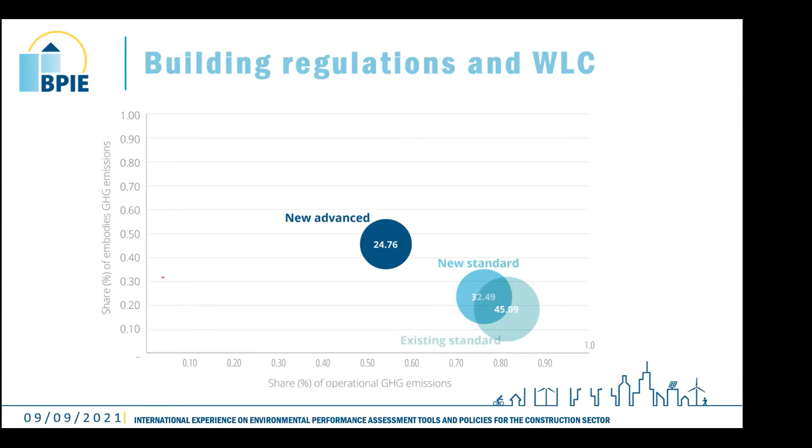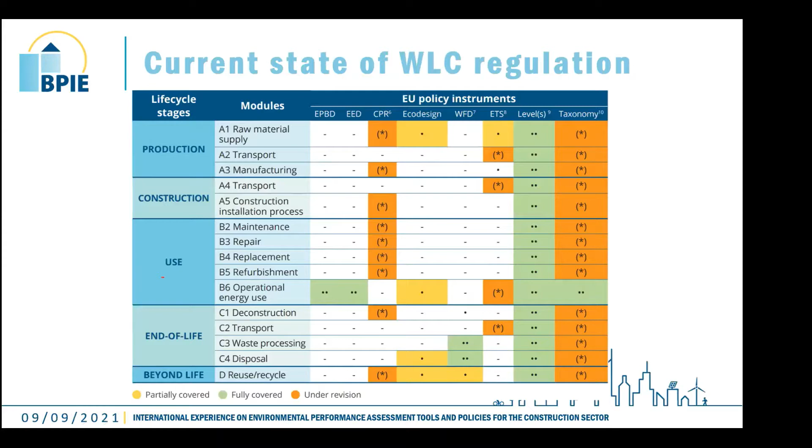Right. So here you can see there's a plethora, a huge range of policy initiatives and measures already in place targeting whole life carbon emissions from buildings. But the issue, as you can also see, is that there is not much consistency. Policy making is happening in silos. But what is very important in addressing whole life carbon in buildings is this level of consistency. Whole life carbon in a way remains unregulated unless the European Commission moves very quickly to review the key pieces of legislation. Can we have the next slide, please?

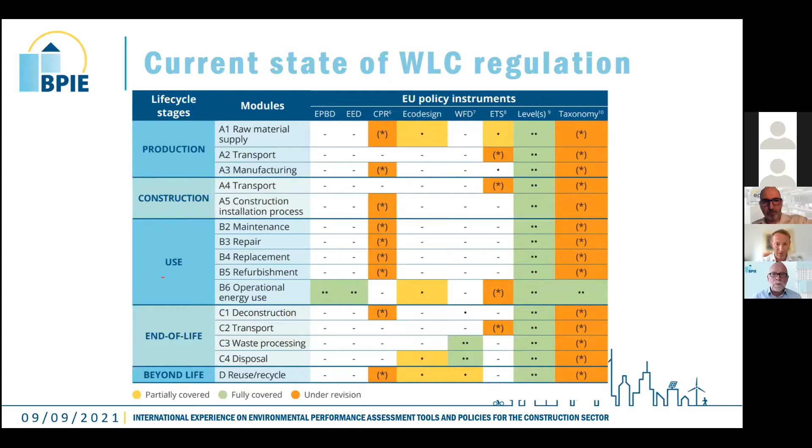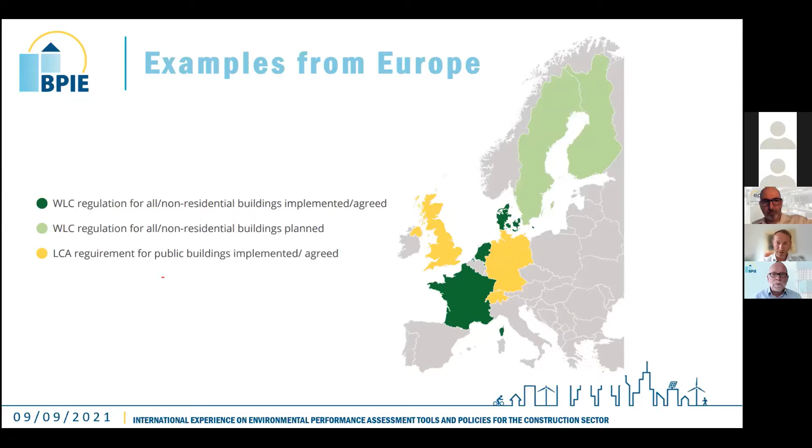Right, so here you can see that beyond the European framework, there are a number of national initiatives in Europe. Some of these address mandatory life cycle assessment for new buildings, like the ones in France, the Netherlands, or Denmark, for example. Others target public buildings through public procurement. So this signals a very clear trend that member states in Europe are moving forward to regulate this, and they also provide a good practice example that regulating whole life carbon is possible and worthwhile to pursue. Can I have the next slide, please?

I just want to give an example of one country, Denmark, because I know later on we will hear about the example of the Netherlands, which can be considered a best practice case and one of the most advanced countries in requiring whole life carbon assessments and benchmarking. I brought up the Danish case because I think it can show how other countries could go ahead with putting whole life carbon regulation in place.

Essentially what you see here is that they have an incremental approach. They started off with a preparation phase, with requirements to collect data and to disclose, assess, and report whole life carbon. Once the data is built up and of sufficient quality, the government is going to set embodied carbon caps and targets at a later stage. As the market catches up with this regulation, the requirements will be tightened gradually.

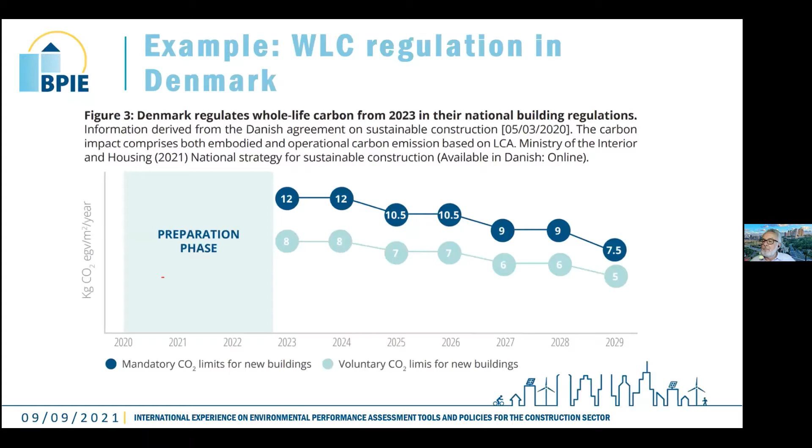Next slide, please. When it comes to a blueprint of how the policy framework should ideally be designed to cater for whole life carbon requirements, we see that we need policies and measures in place at market level, at the material and product level, as well as the building level. Today we are going to talk mostly about product and material level policies, but in a way that they are the building blocks for assessing, quantifying and optimizing whole life carbon performance at the building level as well. So product level policies and emissions cannot be regulated alone.

First of all, we will need to make sure there is market demand for this. This is also very important to avoid carbon leakage and undue burden being placed on certain parts or sectors within the industry. It's also very important that we have the right incentive chain across the whole value chain within the construction sector, which we know is quite fragmented today.

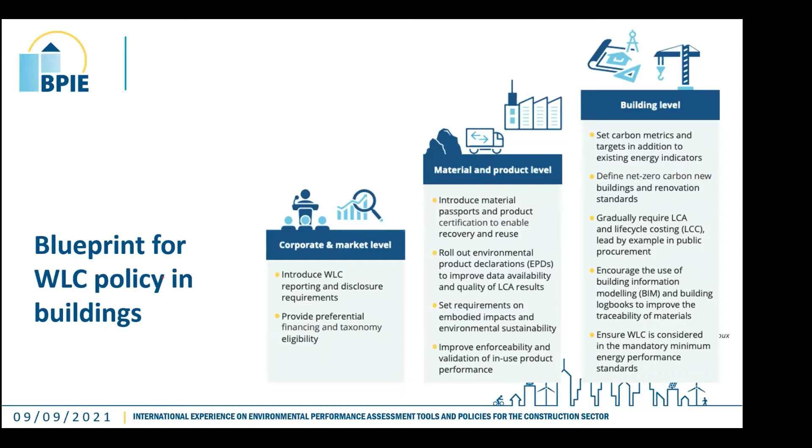Next slide, please. These are my concluding thoughts, some key messages which I'm sure the other speakers will pick up on later. In Europe, many energy efficiency measures are now so ambitious that the low-hanging fruits, the cost-effective measures, have already been taken. So it makes economic sense that the construction value chain is looking for ways to reduce carbon emissions and find solutions from within the embodied carbon sector, simply because these are going to be the low-hanging fruits.

We all know that data availability and accuracy is a critical issue, not just for measuring and optimizing the carbon budget of buildings, but also for policymakers, because they are the ones who will set up the benchmarks and targets, and need to ensure proper enforcement and compliance. However, we cannot use this as an excuse. We need action, first action today. We need to start somewhere rather than waiting for the perfect data to come.

Essentially, what we can see from best practices across Europe is that most of these countries have started off with an incremental approach: reporting requirements, gradually building up benchmarks, setting target values, starting with voluntary measures to build capacity, and then moving to full regulation. I'll stop here because others will probably develop on this in more detail.

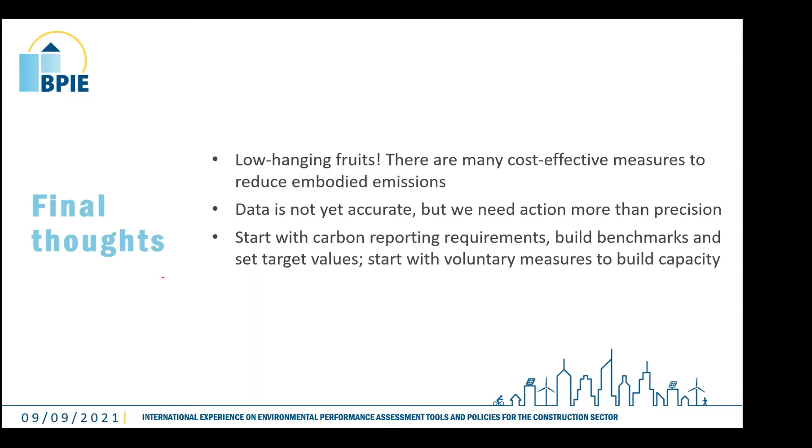Thank you very much, Zsolt, for giving us this snapshot of the European situation and some examples from the European member states on how this whole topic of whole life carbon and life cycle analysis is managed.

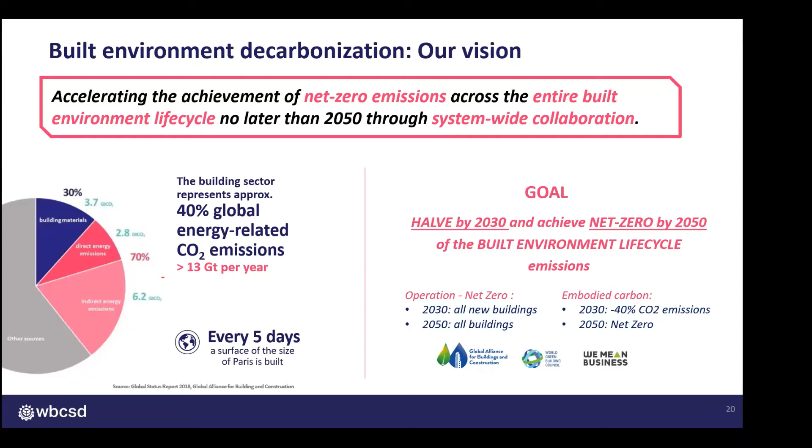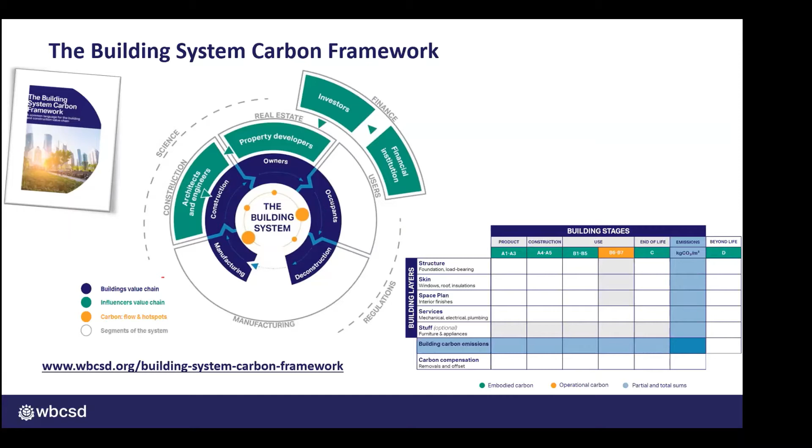Last year, we issued the System Carbon Framework, which looks at how this value chain can work together to reduce emissions. The blue circle is where emissions happen, and the green are influencer organizations—architects and designers, developers, and very importantly investors, who have influence over the whole life carbon of what they finance and develop. And obviously regulation, the topic of today, how regulation can drive this whole life reduction. On the bottom right, you see the framework, and I'll go briefly into this in the next couple of slides. Next.

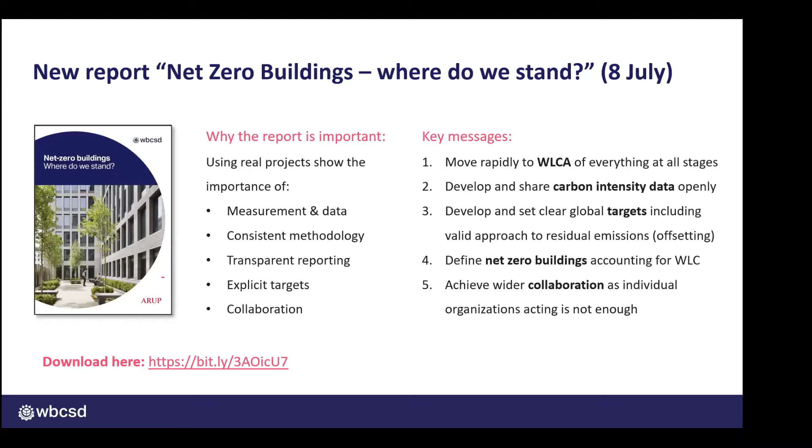We issued in July a new report based on the Building System Carbon Framework, developed with the help of Arup, covering 6 case studies. Just 6 buildings might sound like nothing, but the work was very hard to do, even on Arup-owned projects, to get all the data. We believe this report is important because it shows how we need to measure and report data consistently, and start looking at the targets we need to set across all projects, and how we collaborate to achieve them, strengthening the argument made by Joel about moving to a full life cycle approach towards net zero.

Just a few more technical details on this report. We've taken the Building System Carbon Framework, which puts two charts over each other: the whole life cycle stages from EN 15978 in the middle, showing the life cycle of a building, and on the right-hand side how a building is made up, from structure to facade. This shows how we account for all the emissions across these dimensions. That's what the system framework does.

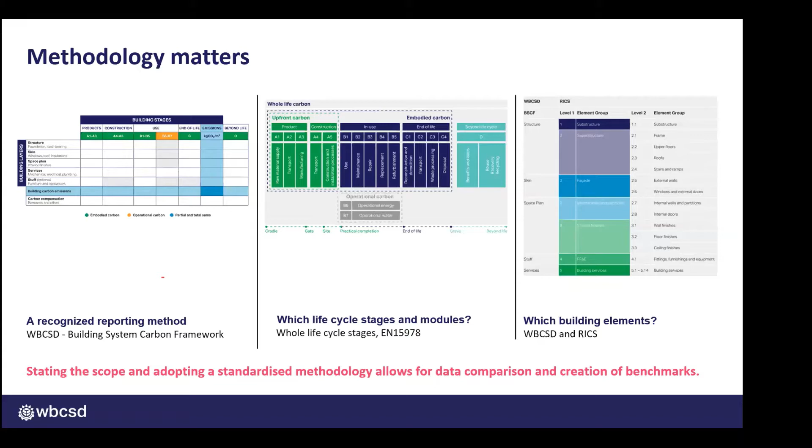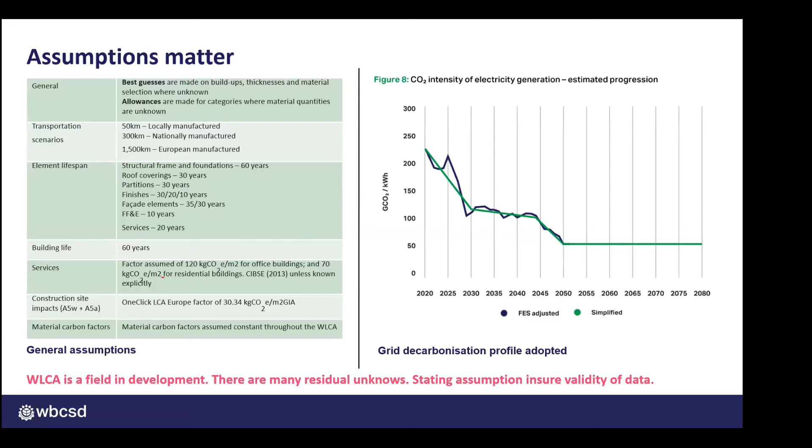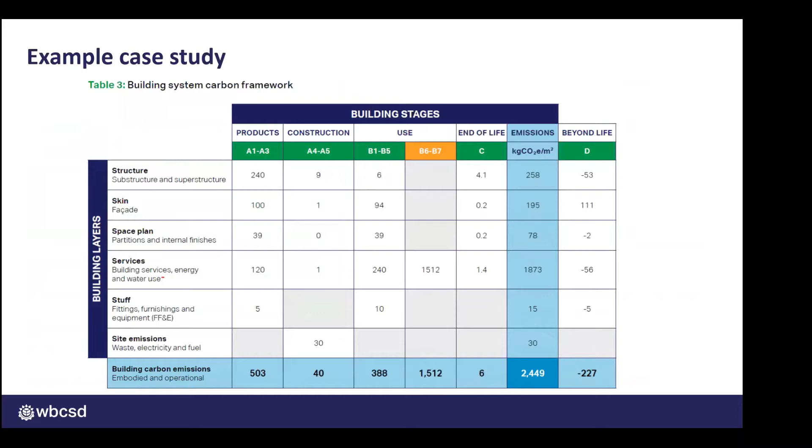This is one example output of such a case study. You can see the building stages and the layers, transparently accounting for all the emissions. On the right, there's a column beyond life—that's Module D. This isn't agreed upon today in terms of how to assess it or use it in LCA, but it's there to show and could support future circular economy strategies to reduce emissions, shown in the bottom right corner, toward net zero.

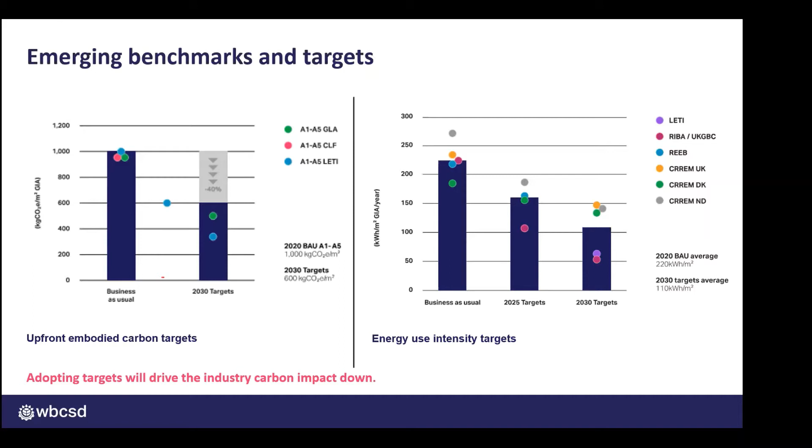In summary, we need to measure more, share data openly, and this report comes with a call to action to our members and other building stakeholders: please send us case studies on whole life carbon approaches. We also need to start setting clear targets. On net zero, there's an ongoing discussion about what constitutes a valid net zero claim, and guidance will be coming out later this year on how to drive toward net zero. But there's already a lot we can do today with existing technology and practices. We'll present this at Climate Week if you're interested in joining the formal launch of the work.

Lastly, I want to mention one other piece of work directed more at investors. Looking again at the value chain, investors and developers play a very important role as demand-side players—though this could equally apply to a city or national government through its procurement strategies. The question is how you can set requirements at the very earliest stage of projects to integrate embodied carbon. It's a practical report showing about 50 different requirements that can be set—no-regrets requirements that can really drive this conversation forward.

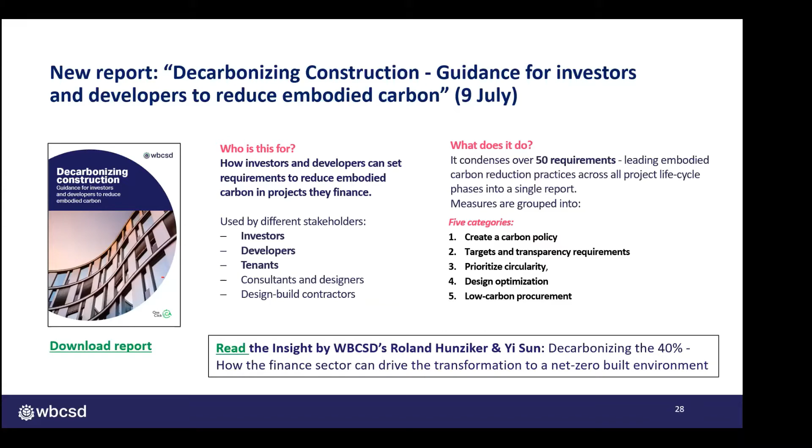Thank you, Roland, thank you very much for giving us these case studies and already highlighting the difficulty of getting reliable data. I'm quite impressed by the analysis you have done here. We'll dive into some of the details later. I'm sure there will be questions, and we're already getting some questions here in the chat, which is great.

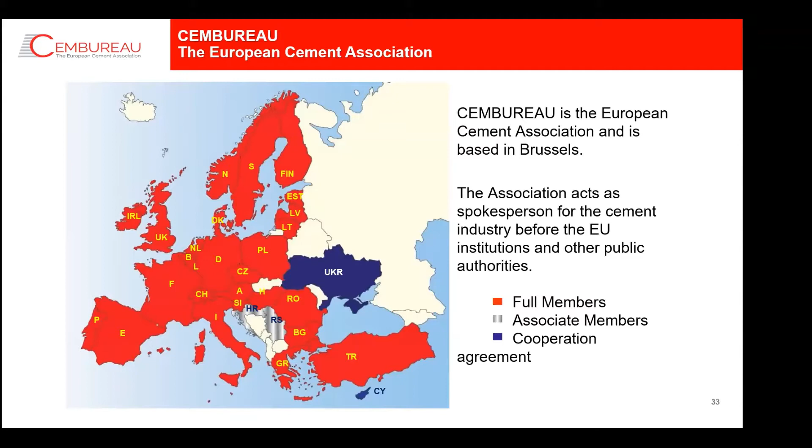So I joined CEMBUREAU 13 years ago. CEMBUREAU, as you can see in this graph, has a large representativeness of the cement industry in Europe, and also counts on cooperation and membership from countries outside Europe, like Turkey and Ukraine. So please, the next one.

I find the sequence of this event quite appropriate. It's interesting to be a representative of the European cement and, in a way, concrete industry. I'd like to start by saying that the cement and concrete industry takes very seriously this responsibility to reduce upfront CO2 in construction. Bearing in mind this responsibility, CEMBUREAU published last year its roadmap to 2050 climate neutrality, taking this approach along the value chain of cement and concrete. Cement is a very difficult sector to abate CO2 alone, but neutrality can be reached if we have the whole value chain together, each part taking its measures to reduce CO2.

This links to CEMBUREAU's position, which aligns with most of the other construction manufacturers in Europe, that environmental assessments should be done at the building level rather than at product level. As the pictures show, construction products are intermediary products to a final product, just like the pieces of a washing machine. In the end, it's the washing machine which is evaluated for its energy efficiency, and likewise the final product, the building or construction work, should be evaluated for its environmental performance.

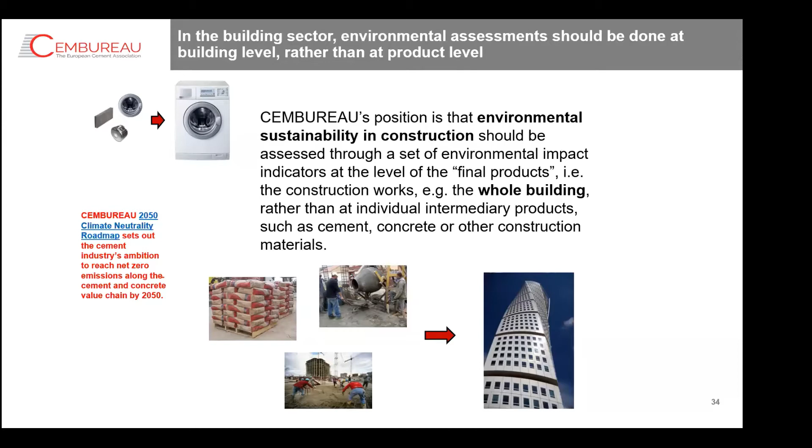Next, please. Environmental product declarations have a key role in all this. CEMBUREAU has been one of the first supporters of producing EPDs for cement. The first EPD for an average cement in Europe was back in 2008. Last year, we published updated EPDs for the three major cement types in the European market, which can be downloaded from our website. So we have always trusted EPDs to be the source of environmental information that the market needs for decisions about the whole construction project. Next, please.

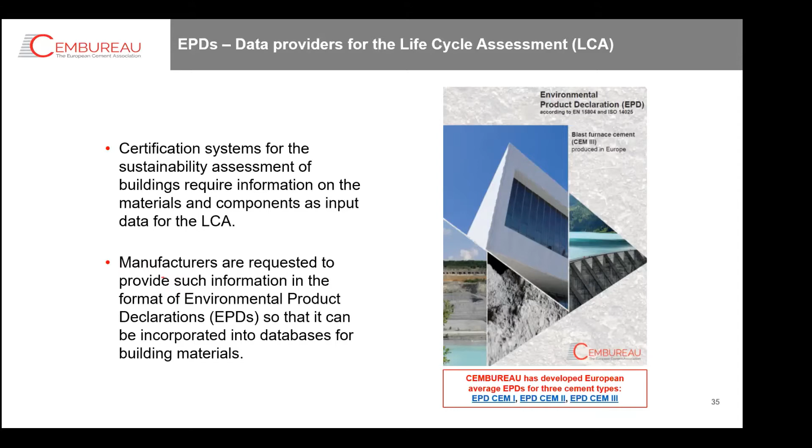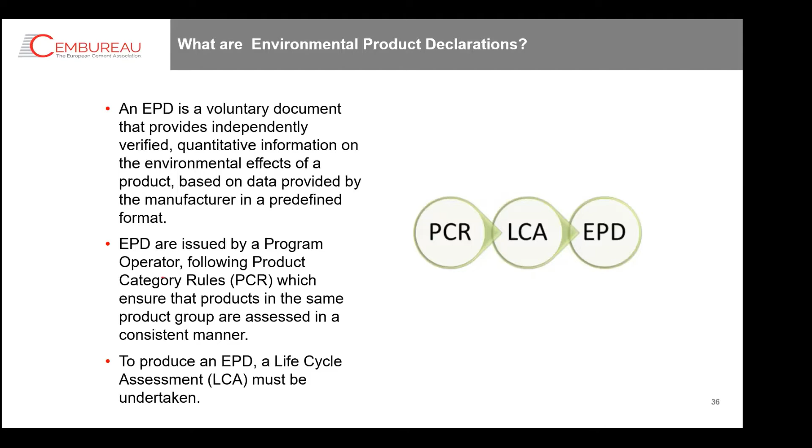So this is based on the life cycle assessment. As you might well know, the life cycle assessment is an evaluation of the environmental impacts of a product from the extraction of raw materials through the end of its useful life, which is called the cradle, and the last stage, the grave.

Usually, environmental product declarations for construction products actually take the stages from the extraction to the gate of the factory. So it's usually called the scope cradle to gate. And if it includes transport, it goes from cradle to site. Next, please.

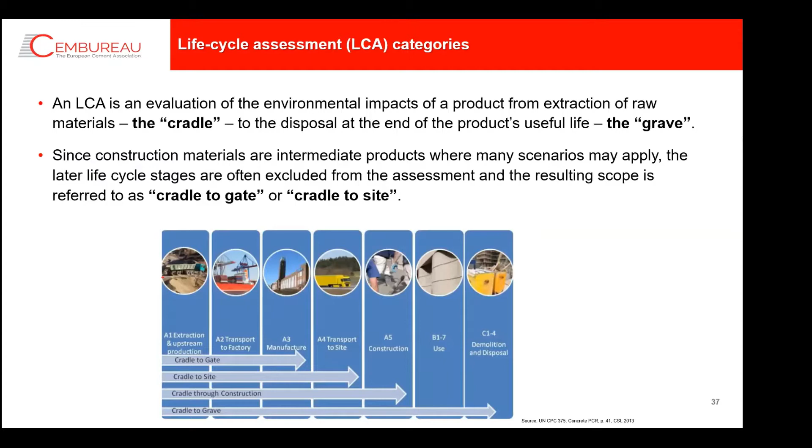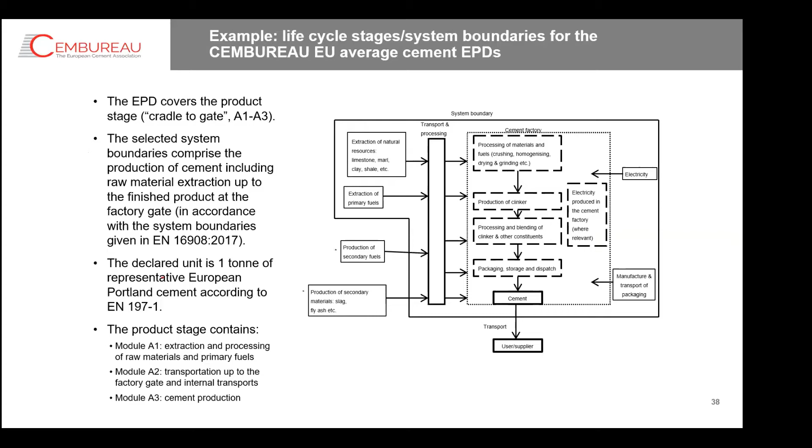Well, the previous one, there was one before, was just to show the scheme that is used in the cement EPDs that you can check in our EPDs that are available. Next, please.

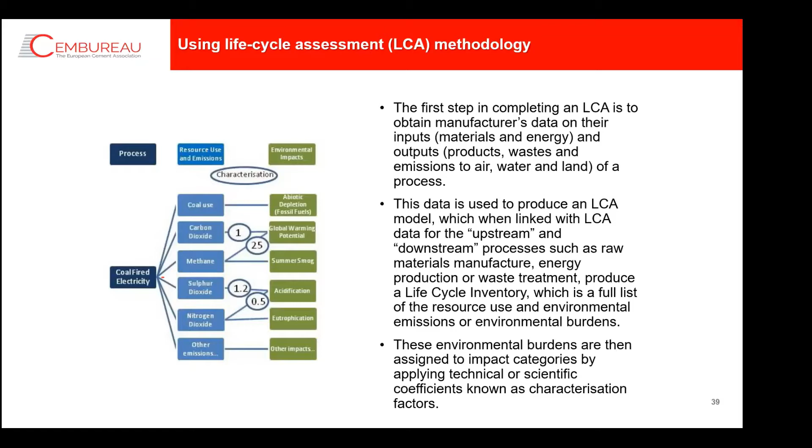This will produce a life cycle inventory that in the end will become environmental burdens on which some characterization factors are applied, which will give some quantitative figures that will form the EPDs. Next. These figures are not so easy, or maybe not easy at all, for a layman who does not know exactly what they mean.

So actually the EPDs are meant to provide information for professionals related to life cycle analysis of a product. So EPDs are not actually meant to be used for comparisons at product level, but actually to provide information for an LCA. Next, please.

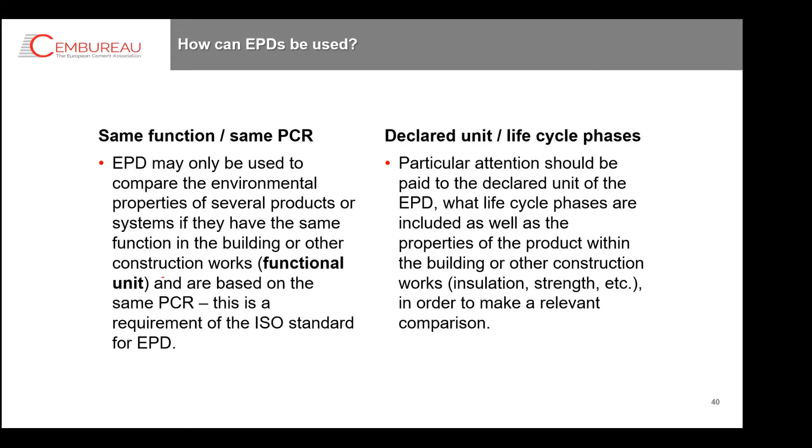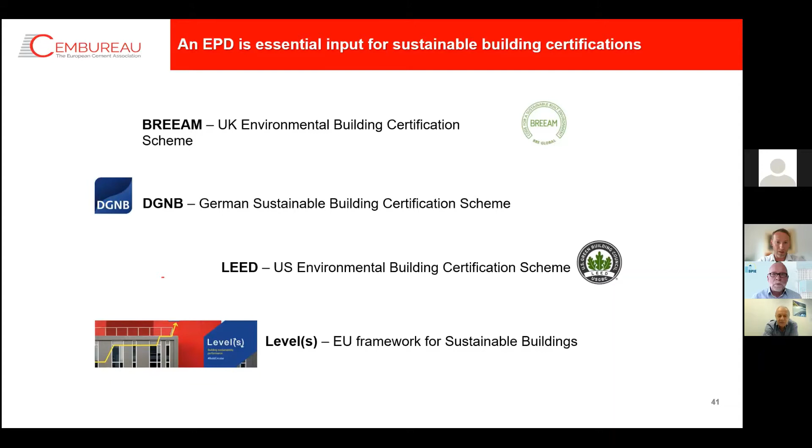There's also Level(s), which is not a certification scheme, but actually aims at being incorporated in these schemes, which is a framework that was recently launched by the European Commission for sustainable buildings. And I'll speak a little more about that. Next, please. So this, I wanted to show the relevance of having an EPD for these certification schemes.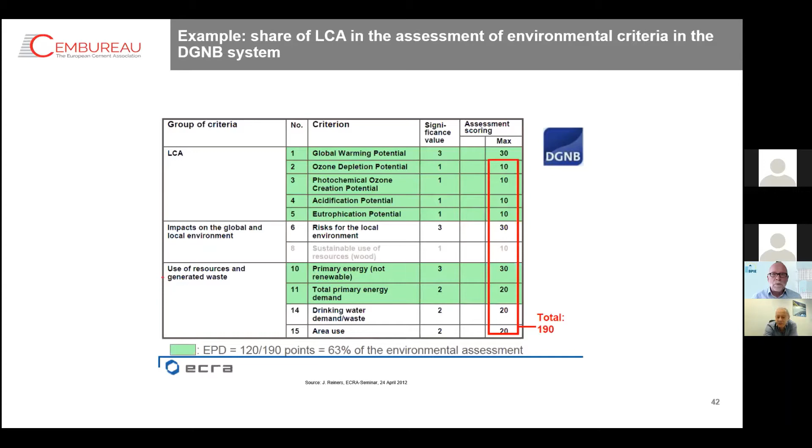For instance, DGNB, from 190 points of environmental criteria that are required, 120 can actually be taken from EPDs, which means that 63% of the environmental assessment could be taken from EPDs. Next, please. This also shows the relevance of having the assessment at the final product, at the building level.

Because you see here, for instance, how an EPD, for instance for cement, is used as input for the environmental assessment for this certification scheme. In this case it's DGNB. So you see that the cement has a very strong environmental footprint, but you can see in the flow that this impact is diluted along the way.

And the whole assessment of sustainability does not take only the environmental performance, but also the assessment of economic and social performance into consideration. So the EPD shows once more its importance as input to these certification schemes. Next, please.

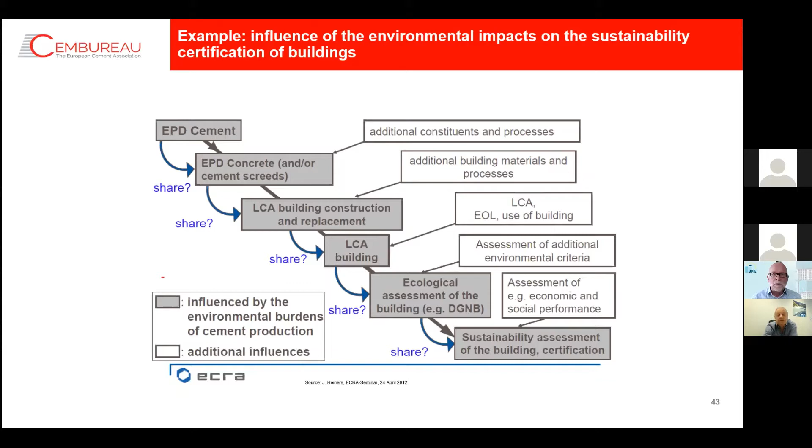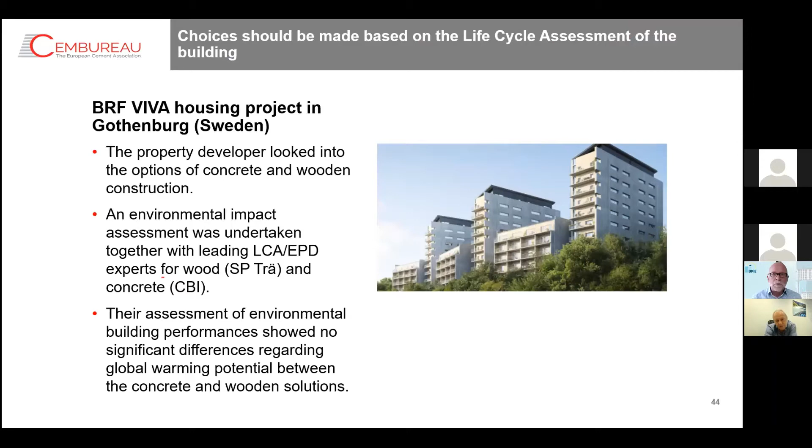And the result was actually that the LCA showed that in the end, both of them do not have such big differences in terms of their potential. So once again, the importance of having the assessment at the project level, the building level, and not at the product level. Next, please. Next.

Yeah, and then a little more about Level(s). Level(s) is this framework for sustainable buildings that the European Commission put forward a few years ago. Cembureau had 3 pilot projects by cement and concrete companies, HeidelbergCement, CRH, and Holcim. And these projects were really successful ones to test this framework.

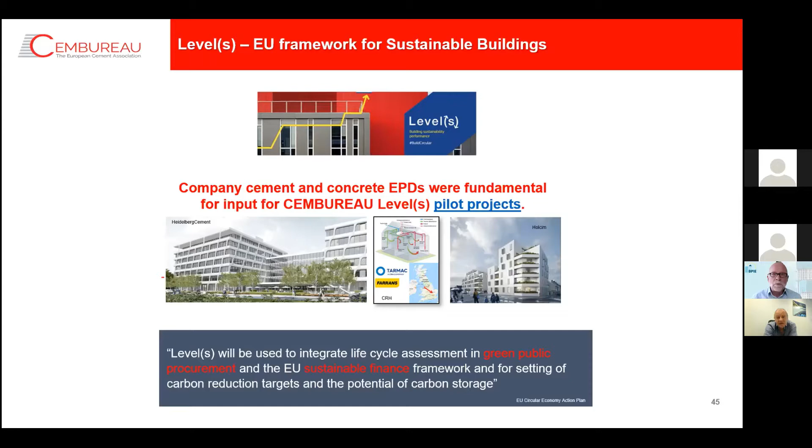And EPDs for cement and for concrete were fundamental for us to have our assessment of this framework. And it's important to say that Level(s) is being used now in the EU for green public procurement, and also for the sustainable finance framework. So the relevance of EPDs behind the system is quite easy to see. So finally, just as takeaways from this presentation, next, please.

I'd like to come back to the fact that the EPDs are extremely useful to serve the market needs with detailed and verified environmental information, and they are meant for business professionals that are dealing with LCAs. The EPDs provide transparency information, and they are not to be used for comparisons at product level, or not even on individual indicators that are there. And the true assessments can be achieved only in the context of the full construction lifecycle. These are my takeaways, and glad to take part in the debate later on.

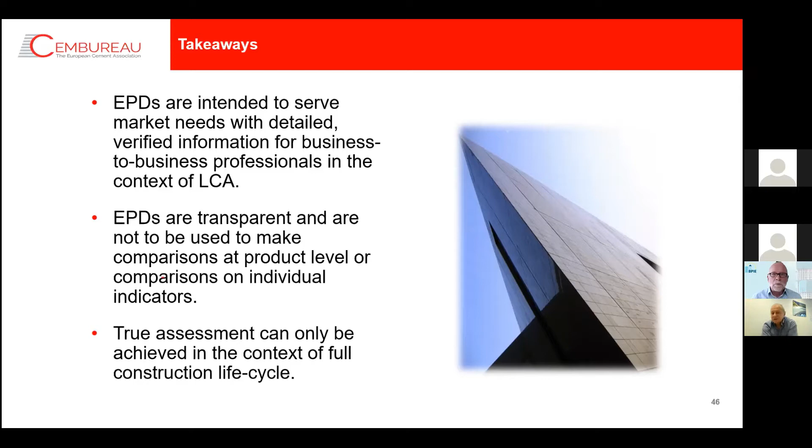Thank you very much for this overview. Later in the discussion, I would actually like to cover a little bit the question, what is driving environmental product declarations in Europe? I think we should talk about that and explain to the audience how this tool was actually established. But we'll come to that later in the panel session. For now, I would like to thank you. And as I said earlier, we will go into more detail throughout the presentations of the experts.

I'm very happy to welcome now two presenters in one go, John Driessen and Tom de Boer, who are both from the Dutch National Environmental Database. They will introduce that environmental database. They will talk about the structure, the governance, the business model, so everything that is needed to set up and make this database operational. And then Tom de Boer in particular will also talk about its application, how it's being used. So I'm very happy that the two of you can join us today.

I hope you are there. If you could please switch on your camera and your microphone, then we will start with the presentation. John Driessen, you are the first to start, if I'm not mistaken, and then we have Tom de Boer. John, are you there? I can currently not hear you, unfortunately. Hello. Yes, now I can hear you and I can see you. Wonderful. And you can hear me, Oliver? Yes, now I can hear you. Thank you very much. And we have your presentation on the screen. Okay. So please go ahead. Thank you again for joining. Yeah, sorry, my excuses for the complication with the sound.

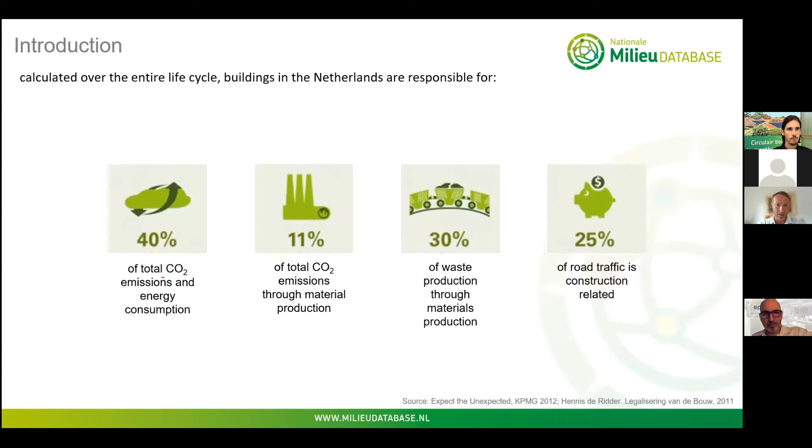Calculated over the entire life cycle, buildings in the Netherlands are responsible for 40% of the total CO2 emissions and energy consumption, 11% of the total CO2 emissions through material production, also 30% of the waste production through materials production, and 25% of the road traffic is construction related. This brings us to a long road to buildings decarbonization in the Netherlands.

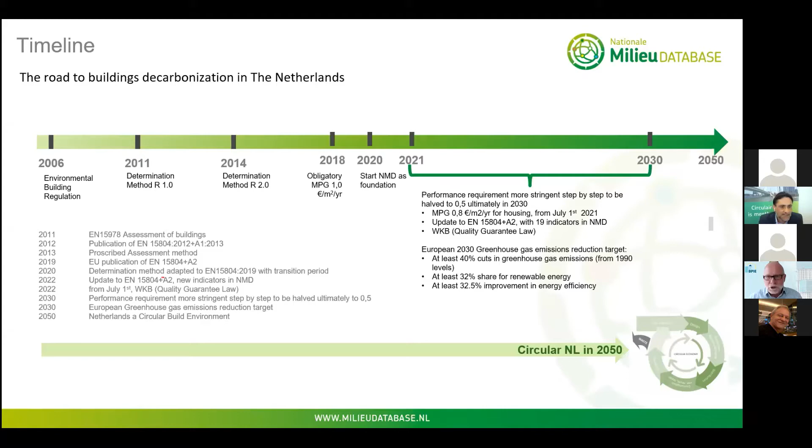The Nmd is established as an independent organization to manage and maintain the determination method and the associated database. We are responsible to keep a uniform assessment method based on the LCA and the EU norms. We have the storage of reliable LCA environmental data on a central database hosted as an independent organization.

We work in construction with market parties and government. We do the comparison of buildings, and we don't do the comparison of products. We're an organization of a transparent and verifiable system. And we aim to have a level playing field for all involved parties. Next.

Like I said before, our common goal is to make in 2050 a circular building environment in the Netherlands. Next. The structure of the Nmd Foundation is as follows. We're a small company with a big responsibility. Like I said before, we were before the SBK, a construction quality foundation. It was a kind of authority and keeper of the database and determination method. We had to split to be independent and objective in the Dutch market of construction materials.

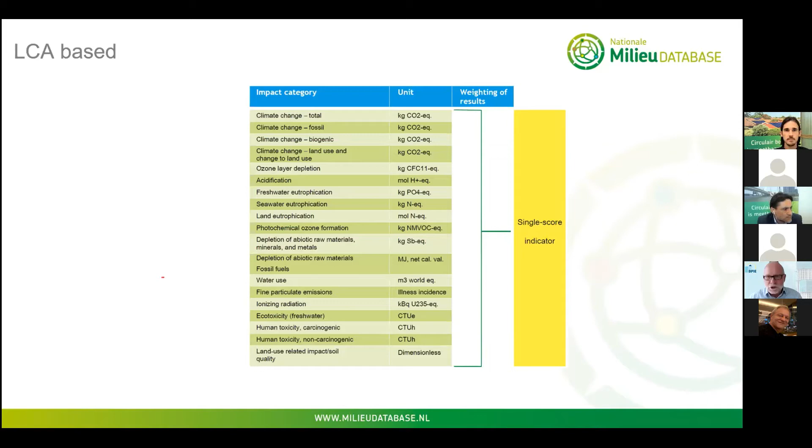A second application is green procurement. So especially in the infrastructure sector, this is used to make it possible at least to compare different kind of organizations that subscribe to certain tenders, to compare them based on environmental scores.

Subsidies are granted based on the sustainability of certain products or circular buildings. So that's the third application. It's also used in BREEAM, like the previous speaker already mentioned. And we also have a Dutch organization that makes use of this, the BREEAM-NL. And lastly, it will be used for quality regulations in the future, probably from 2022 on.

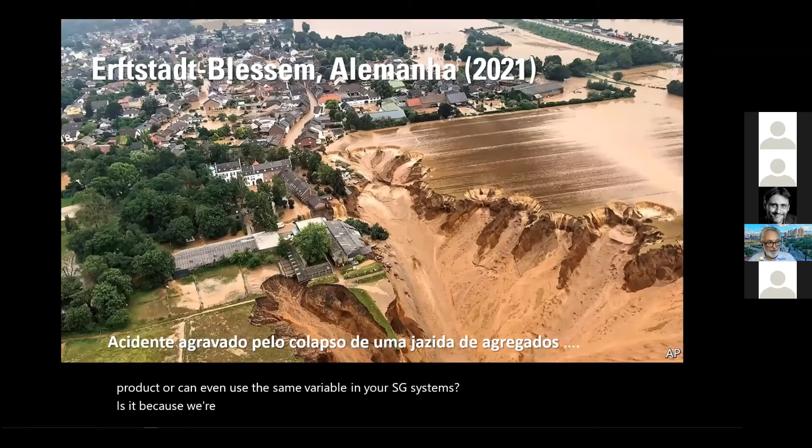Why are we doing this? I'll repeat it, as few of us have any doubts regarding the seriousness and impact of climate change in our lives. Climate change is not something for the future, it's something present here.

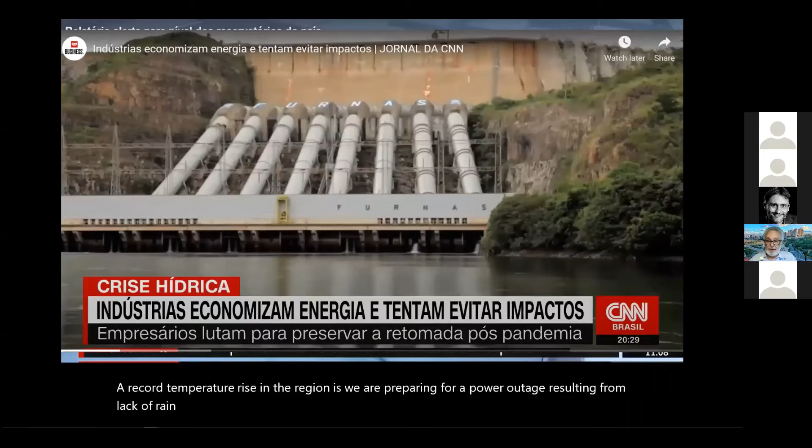So the results are all there. There's a consensus, and I'll cite The Economist here, that if nothing is done, if we keep going the way we're going, we'll reach a 3 degree temperature rise, and nobody's safe. It's everybody's individual interest to take mitigation action regarding CO2 emissions.

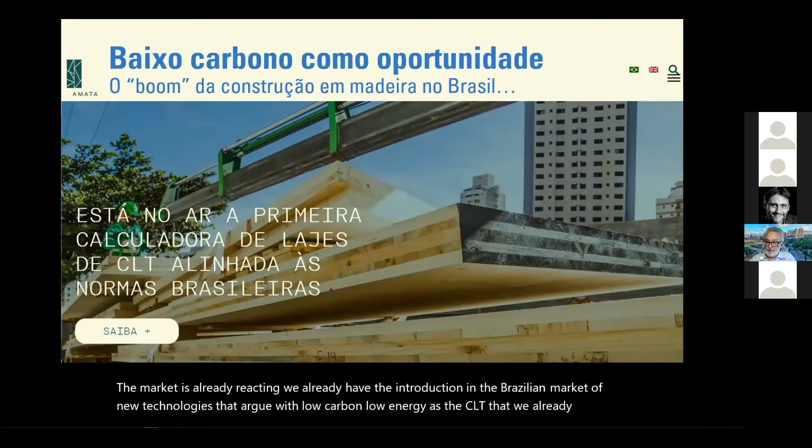3 or 4 years ago, not many economists agreed that the carbon tax was a good idea. Today, the International Monetary Fund and economists even agree that a tax for carbon is necessary. And in Brazil, this is being talked about and it is necessary.

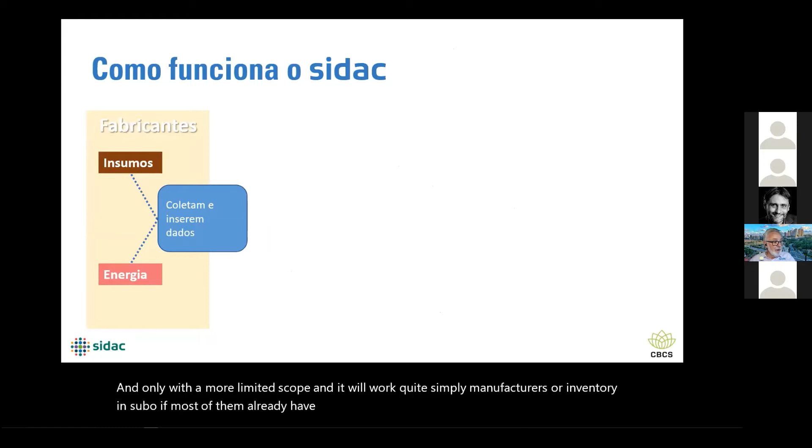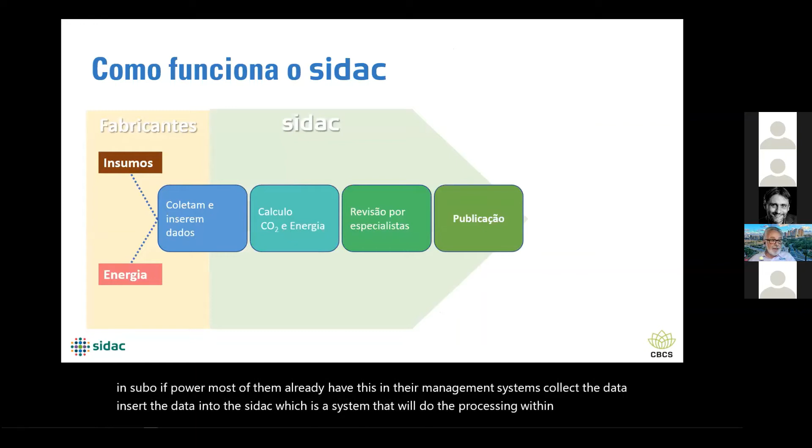We have the manufacturers who have the energy input, and they collect and insert data in SIDAC, which is a system that will process this. Within this process, which is similar to any global process, the specialists will evaluate this, and then the data will be published, so the clients can look at this.

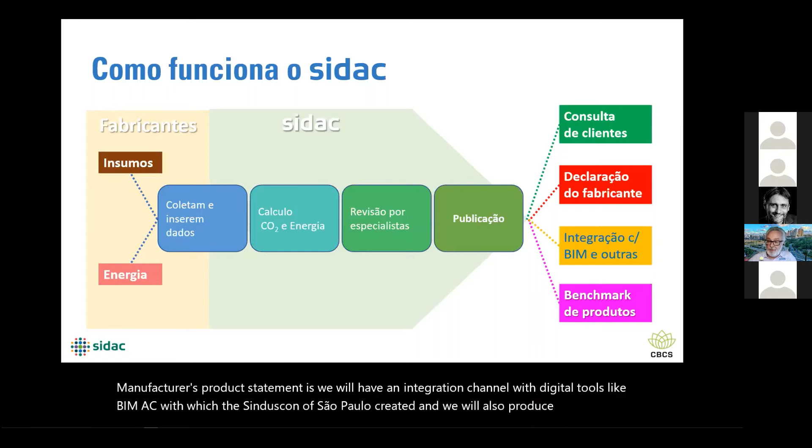We will also automatically publish the manufacturer's declaration on the product and an integration channel with the BIM, as well as something that nobody has right now, which is a market benchmark for each product. So since the beginning, we will present to consumers what is the range of CO2 and energy expected for a specific product in the Brazilian market. And this will make the consumer more aware about their decision power.

So what will people use this SIDAC data for? To select manufacturers, which I think is the most important thing. They can use this also for companies and sectors. We believe in continuous improvement, so seeing this potential for improvement and possible positive competition as well. And we also think this will influence public policies and purchases.

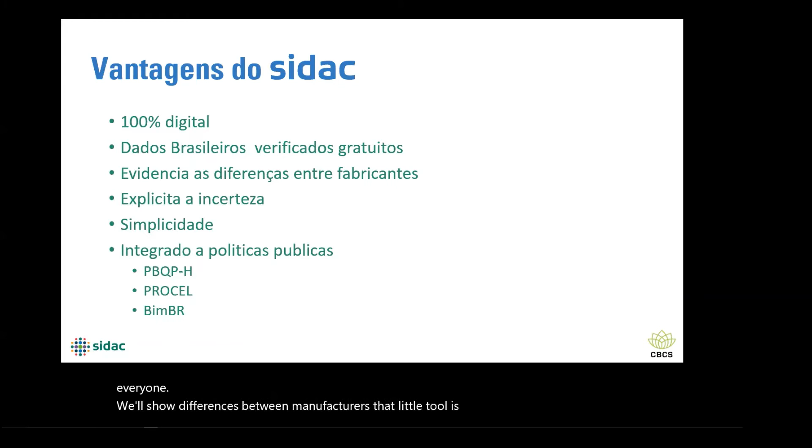Our advantage is that we are 100% digital. The Brazilian data here is verified and free, accessible to everyone. So we will also put in evidence the difference between different manufacturers. We will make it clear when a manufacturer does not have an EPD for their product, and therefore a person cannot know what the footprint is for their building in a situation like that. Our method is very simple, and it will be integrated into our main public policies in construction.

We are in the SPIPA project, which is an EU project focused on helping countries meet their commitments for the Paris Agreement. We are creating a methodology for the database. The MME is in the general coordination of the project. The CBCS is overseeing the execution. We have the participation of sectorial associations as well.

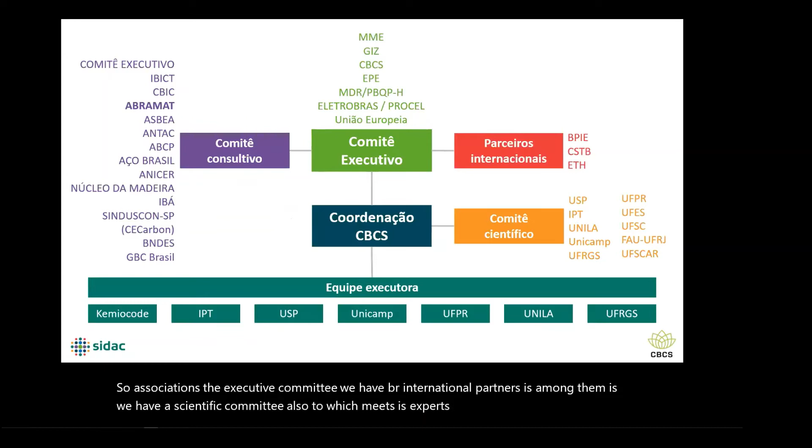And that's it, thank you very much. We are starting a new journey now. Perhaps we are 20 years late, but it's good to get started.

Thank you very much, Professor John. As you say, well, it's better to start late than never. And I'm sure that the change will accelerate now, because you have pointed out the urgency to address climate change. You have shown in your introduction how the world is being impacted very heavily by climate change already today. And I am quite convinced that the presentations which we have heard today are already a sign that the awareness and the willingness to change, in particular in the construction sector, is increasing, and that people are increasingly taking action. What kind of actions should be taken is something we will discuss a little bit more in the panel discussion and in the Q&A session. I would like to thank everybody for the many questions which we have received already, and we have a long list of questions which we're just preparing and which we will address in a moment.